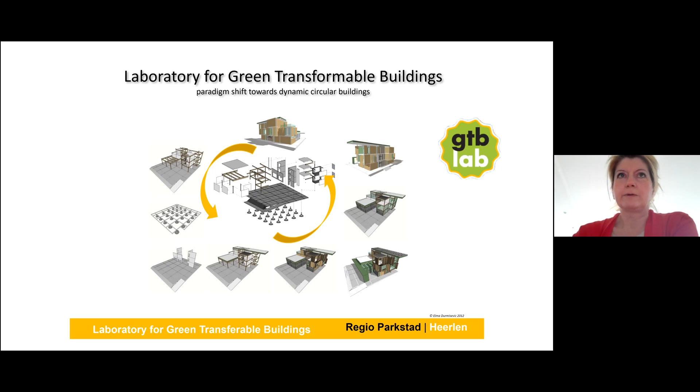So that's the key issue around the development, and all tools and protocols that we are developing in that direction have to do with this great fundamental shift in the way how we see buildings in general. And that brings additional complexity to the system of architecture and construction in general, which deals with integration of functional, technical, and aesthetic systems and subsystems into a final system of building.

And this new approach towards reversible dynamic structure increases also the complexity of the design process and later construction, as the design teams need to deal with dynamics of spaces of buildings. We need to define multiple strategies for use of the building, but also use of systems, components, and materials.

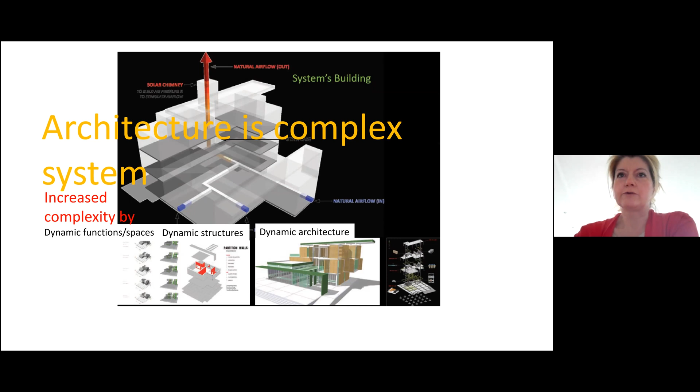And that will bring us also to the discussion about the architecture and dynamics of architecture, and how it will still remain a kind of coherent part of our society, and the part which is providing a cultural continuity for future generations. So that will be kind of an interesting aesthetic discussion that we are coming into.

But going back to the talk of today, the aim of GTB Lab is to demonstrate these reversible building concepts and the impact that such buildings and buildings designed in such a manner will have on new value propositions, and will enable us to design upgradable buildings and built environment in the future.

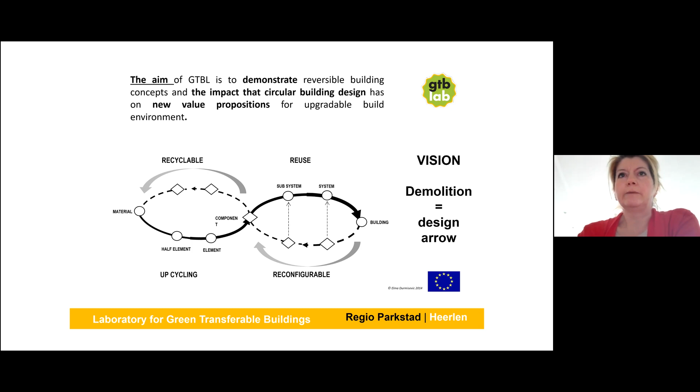And basically, we try to close this loop of material use and the material streams through the built environment, and eliminate waste by design, because everything starts with design.

What we'll try to do with the demonstrators, which will be happening on the site of GTB Lab, is to demonstrate that it is possible to reduce the waste significantly also during construction, but also during transformation of buildings. It's possible to reduce the consumption of raw materials, CO2, and also at the same time increase comfort by integrating natural light, air, and green in the buildings.

So it's a kind of integrated approach to the better life and better quality of buildings in our new world of circularity. We do that by designing and focusing on design for high reuse potential of buildings and their parts, and especially looking into the connections.

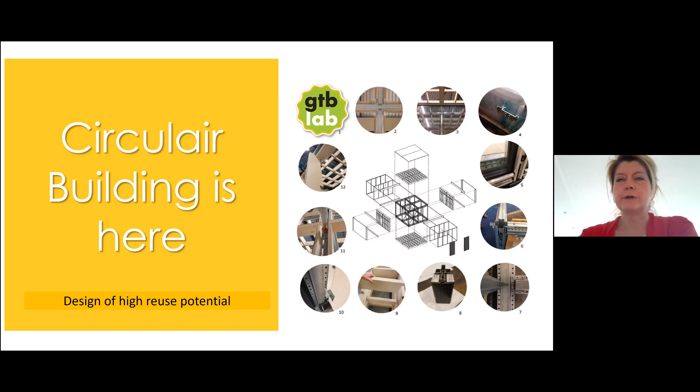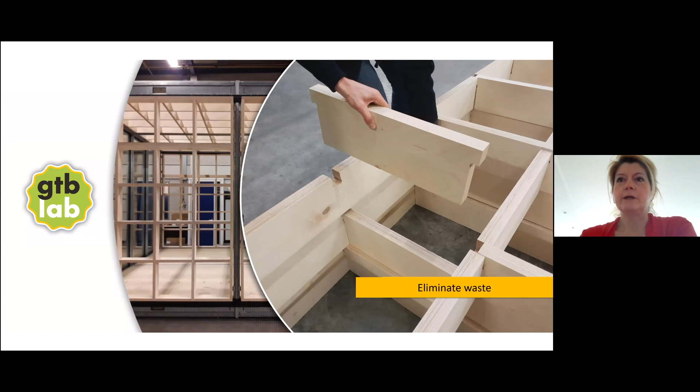One of the important aspects of this new generation of buildings is also looking into exchangeability and design of functionally independent parts of the structure, which can be easily taken out, and checking and analyzing the assembly procedures, which will enable us to design and deconstruct parts with high value recovery in mind. Because everything I've been talking about stands for a new way of perceiving buildings, which I call reversible buildings.

I developed reversible building design protocols during a European project, buildings as material banks, and continue working on this approach further. Basically, reversible buildings stand for buildings which have multiple layers, as you can see here. Buildings have multiple dimensions, and these multiple layers gain multiple future capacities, and therefore future value propositions. That's what we are demonstrating and working on.

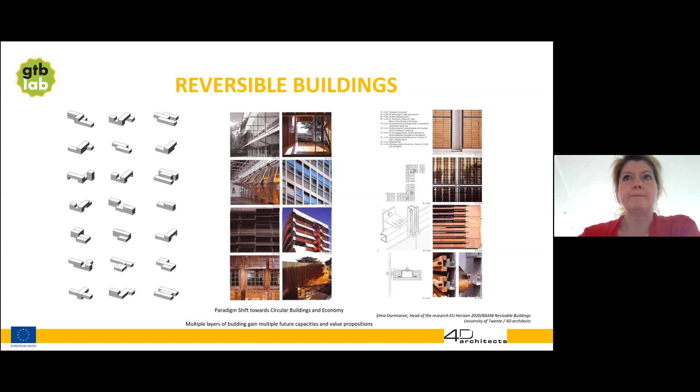That whole development has actually been boosted very much in recent years. I've been working on this for more than 20 years, but I feel and see that these discussions are involved more and more. So there's a kind of awareness of urgency to move swiftly because of the state of the art today.

Environmental issues and degradation of our environmental capital, which we see today—there's something which we have inherited. The life support system that supports various ways of life on the planet is being destroyed by our actions and the way we consume materials. Of course, the built environment has a major impact on this situation. We realize that the way we are consuming materials is creating and leaving behind dead matter, which is not producing oxygen or clean water or whatever, and brings us to a very dangerous situation.

That's the reason why we are talking today about circular economy, and we are trying to figure out ways to move away from this take, make, and waste economy. This involves a lot of discussion on economy too—that's why it's called circular economy, as our whole economy and consumption is built on consumption of resources. And that is exactly the reason where things go wrong: if we want economy to grow, we have to consume more resources.

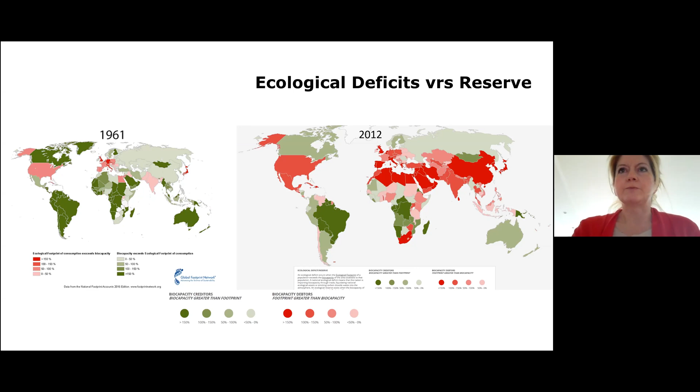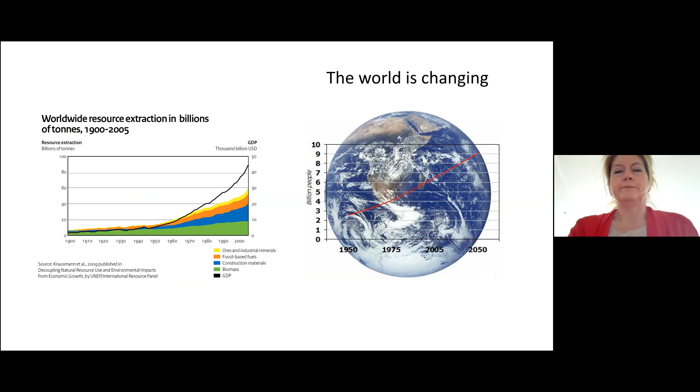Compared to their consumption per year, we see these colors and the planet colors rapidly turning red, meaning that there are more and more countries who consume more resources per year than they have at disposal. So that all brings us to the understanding that this kind of linear consumption of resources, with increase of population, brings us to the point where we will need many more planets in the future in order to sustain life on Earth.

So therefore, the discussion is on the way to change the system, how to redesign the system towards a remake system, where the waste from one industry would be seen as a resource for another one. And when we look into buildings and built environment, that means we should come towards an understanding of our buildings and built environment as a big resource pool and bank of materials for future buildings, and that material streams through built environment need to be organized in that way.

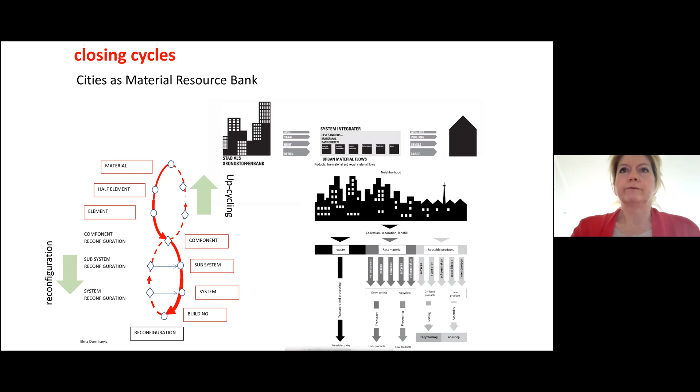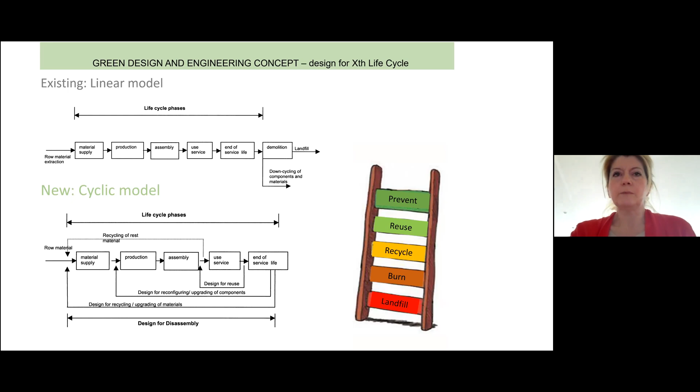So that means we are shifting from a linear use of resources in construction towards closing the cycles, a circular one, where we need to create the smallest circle possible when talking about recovery of materials.

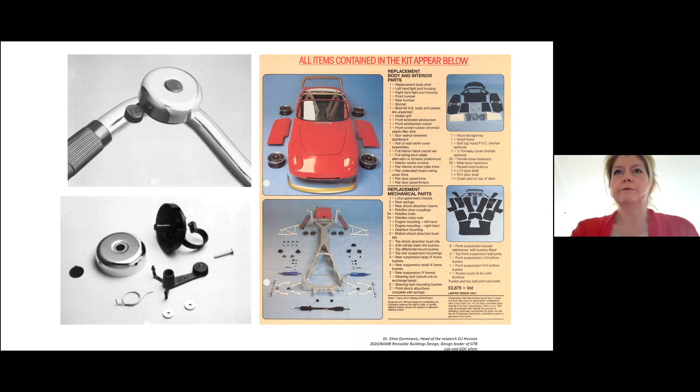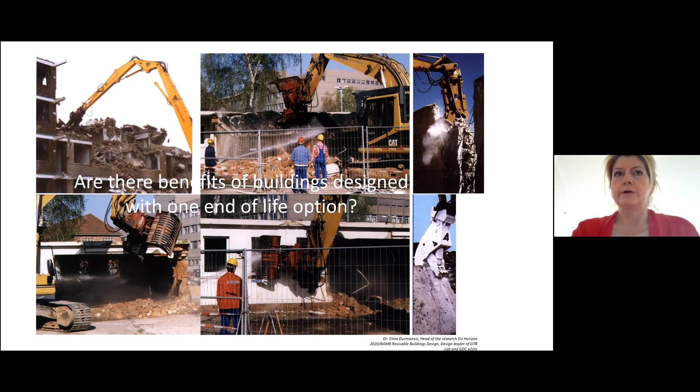In other industries, when we look into other industries, this is a very common approach—it's called design for disassembly. It exists in the car industry for almost 100 years, more than 50 years, and in other product industries as well. But when we look at construction, of course, we know that it's the most conservative industry, and it takes much longer to bring these new approaches into design and then construction.

And the reason for that is, as I said before, because we perceive building as a static structure, and construction is optimized around the reduction of costs and the time of construction. We don't take into account that materials which we bring into buildings have different technical life cycles, but also different functional life cycles.

That's the reason why that's happening. And what we are doing in the GTB Lab is we are trying to reverse these relations with dependencies in building structures, develop a new approach to understanding and designing structures, wherein from this dependent relational diagram, we will move more to more open hierarchies built on two very important indicators.

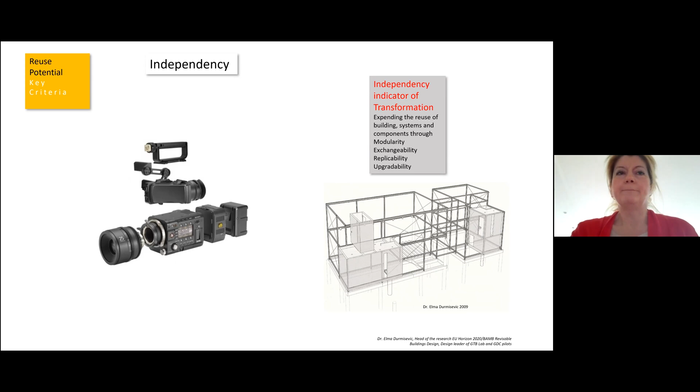Independency is creating buildings with independent, exchangeable modules, like cameras, whose functionality can be adapted by exchanging different functional modules of it. And this exchangeability, by standardizing connections, again, experience of similar solutions can be found in electronics and other industries, which are inspiration to what we are working on.

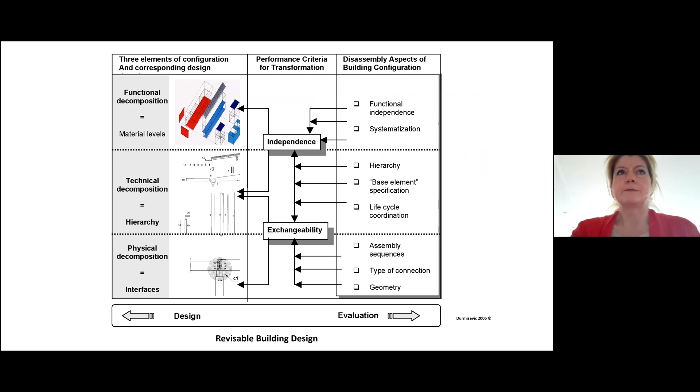Because independency and exchangeability are key for us to work further and identify approaches in design and construction to allow for functional, technical, and physical flexibilities and reversibilities of structures. And that's how reversible building is designed and defined.

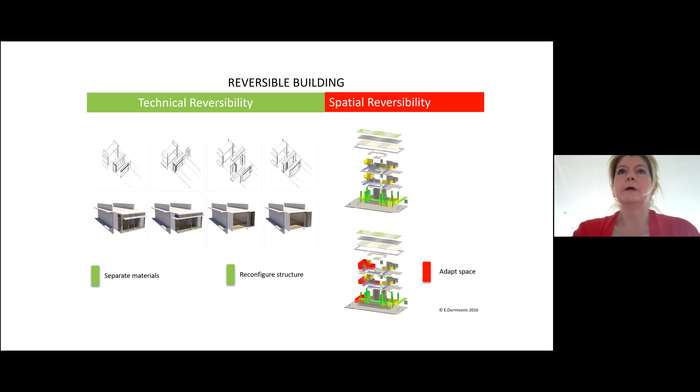This reversible and circular building has at its core two key elements. It has its spatial dimension, and a real circular building should not be demolished at all — it should be upgraded and transformed. And it has a technical reversibility dimension, where parts and systems are recovered and materials separated for other use.

In terms of design, I defined three dimensions of design of reversible buildings: spatial, technical, and material, which are built around the key triangle of reversibility, built on adaptability and reuse, supported by disassembly.

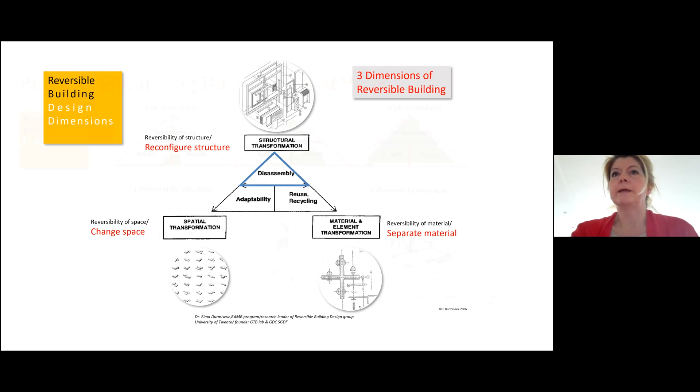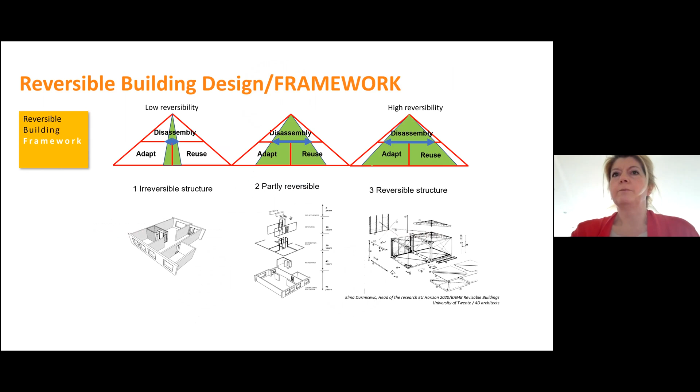So this is a general framework, maybe a very long introduction, but a general framework which helps us understand the performance of buildings with respect to their reversibility and circularity, and helps us cluster all buildings from irreversible to reversible, and develop measurement tools to indicate which parts of the structure of the built environment are reversible, which are not. As you can see here, I will not go further, but that's the framework.

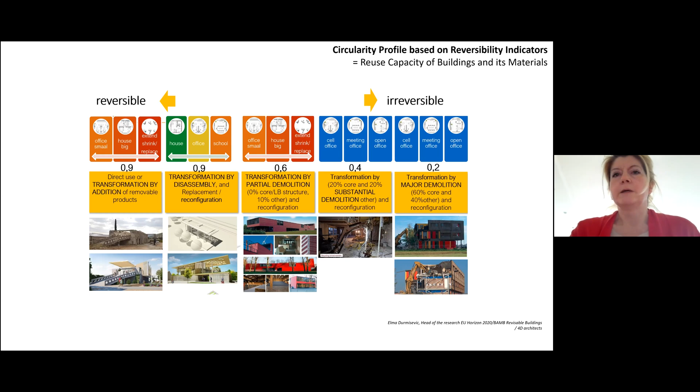On one hand side we built the design protocols, on the other hand side, tools and measurement systems that help us understand the profiles — circularity profiles built on reversibility.

In order to support designers, but also construction industry and everyone interested in improving the built environment towards circular and reversible, I developed a toolkit which has, on one hand side, reversible building design protocols, but it starts also with tools which assess the reversibility, technical reversibility of the building, and how easy it is to take an element out.

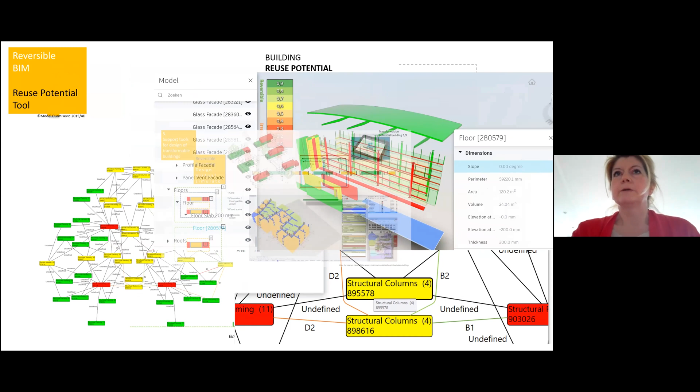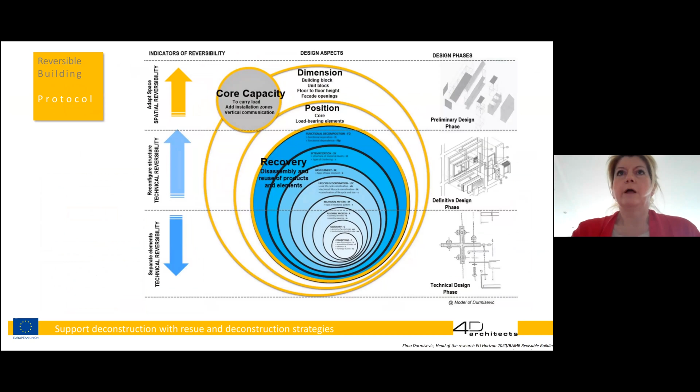It also looks into the spatial dimension of a building, and measures technical capacity to adapt to different functions. And there is a protocol for designers which informs them how to design buildings and products that are reversible, and will help us come to an upgradable built environment of the future.

So this GTB Lab is bringing all this together — on one hand side, development of knowledge, capturing and sharing knowledge, but on the other hand side, also demonstrating and developing physical concepts, building concepts and products, and demonstrating how they look.

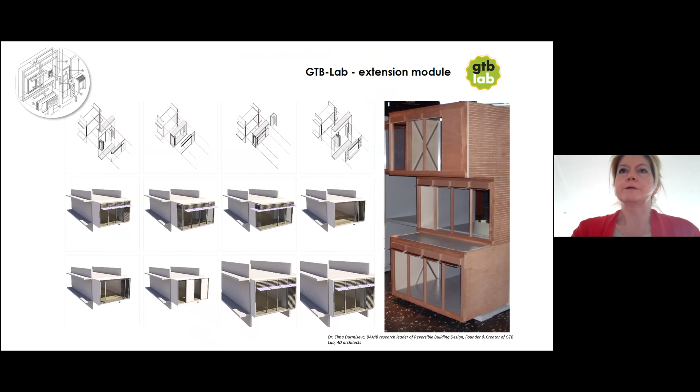Within the lab, we are developing new systems as part of the facade system, for example, but also bathroom systems, as everything in a building needs to be redesigned in the direction of easy recovery and transformation of spaces.

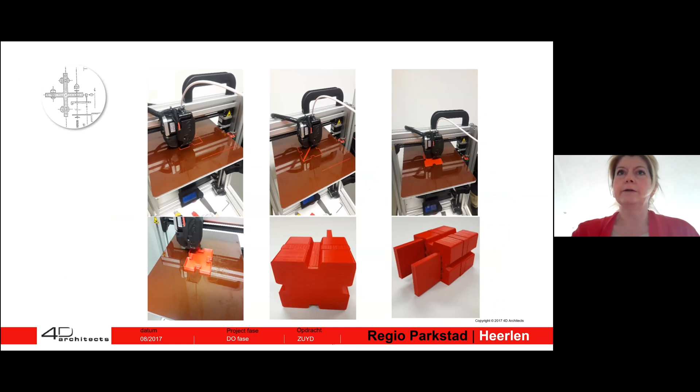But we also develop connections with industry that will enable this reversibility of other parts in a building, prototyping different new products together with industry, demonstrating how they work.

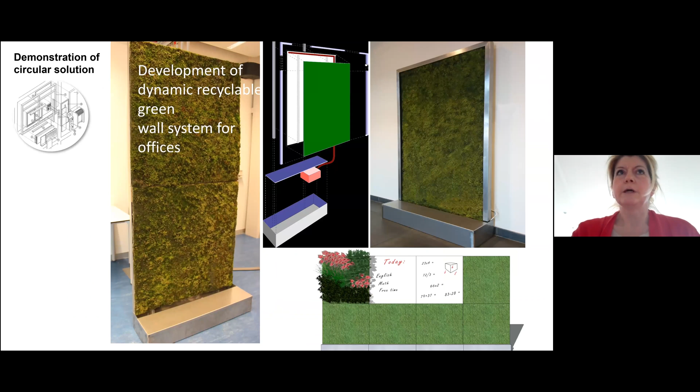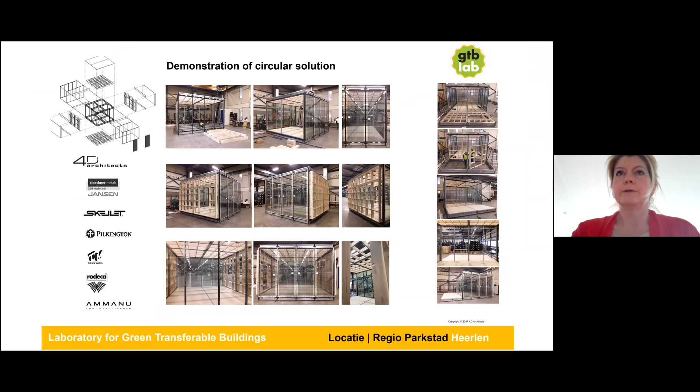We also help initiate new industrial processes in order to help industries start investing in that direction as well, and of course demonstrate — we'll be demonstrating on site with the GTB Lab how this transformation happens without damage to the materials and with high-value reuse of materials themselves.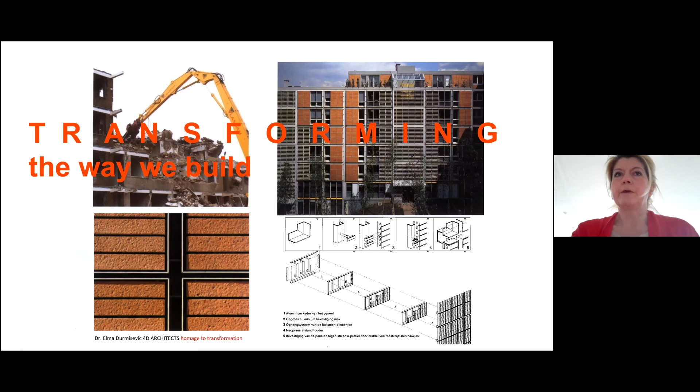So this all brings us to the point that in the future we will need to design and perceive spaces differently, treat and use materials differently, rethink the way we build, how we construct — new concepts of construction methods and so forth — and most importantly, rethink the way we design buildings, as everything starts, as I said, from design.

Much of this I went through very fast, many complex things here, and I'm very aware of that. Much of this you can find, as it has been integrated by the European Commission into the circular economy principles for building design.

So many of the indicators I was talking about have been taken over by the European Commission. There are also some guidelines as a result of the BAMB project. There's also a book we published on 5 pilots where reversible building designs have been tested, and some exploration works with students and so forth.

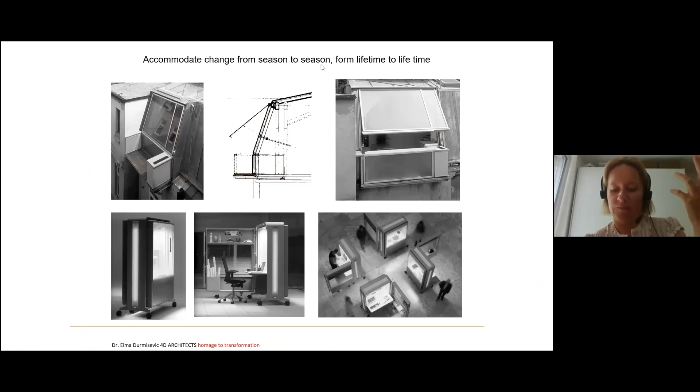Hello. Yes, I can see myself. I hope that you can hear me. Yes. Really enjoyed your presentation. Thank you very much. I was wondering, in terms of the reversibility, some of the pictures that you were showing were looking as if it was focusing on just the structure of the building. But have you also thought about things like the heating and cooling systems? And if so, when you do your once a year reversible or reconfiguration, what happens then? What problems or what solutions have you found in those areas?

Yeah, that's one of the very important parts of the experimentation. So we started construction, as I said, 2 days ago, and this year we are building up the first phase. Most of the parts that we are going to build will be a core of the structure, and in the design of the core we took special attention to the installation surfaces. I had very good advisors here, the top advisors in the Netherlands. We looked into the ways how to build up the concept, where the installation concept will enable us a kind of modular approach to installations as well.

That is one of the things we'll be exercising and actually illustrating, that you can develop integration of installation concepts also in a way that will support transformations of the building without demolition. I'm always telling especially the students of architecture, when I work with them in design studios, we will need very smart designers and architects in the future, because I believe architects will be more involved in design of the invisible cores, which will basically give life to the building in the future. And very often those are really the parts which you don't see at first place, but are very important parts. So that is absolutely a very important part of the exercise.

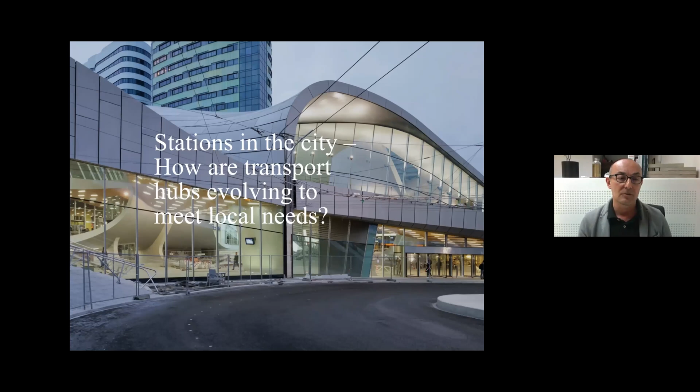So we focus on one material, the facade cladding at the outside, and we follow the whole process from manufacturing stage to operational stage to disassembly stage and the design stage, and we collect all the data into the material passport and connect it to the blockchain.

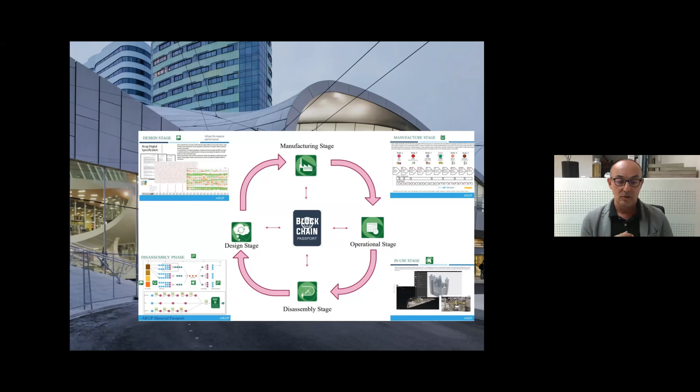So we make an architectural infrastructure to secure the information and to know in case of a disaster. We can provide secure data information so that we can track the process and product to find out if it's due to renovation, maintenance, toxicity of the material, or reusability.

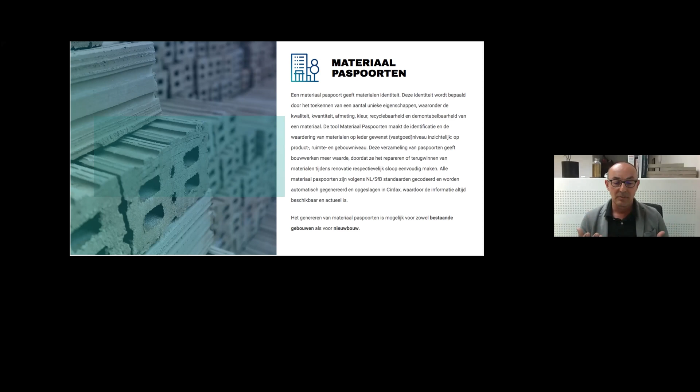Another tool that we designed in Cirdax is the material passport. It gives material identity, and you need that identity determined by assigning a number of unique properties, including the quality of the material, the quantity, the size, the color, the recyclability, and the dismantling of the material.

With a license, you can get into the data system of Cirdax, into the data information platform. And then you have the material passport tool, and it provides insight into the identification and valuation of the materials at any desired level, so a product, a space, and a building level.

The collection of all these passports gives buildings more value because they make it easy to repair and recover materials during renovation or demolition. All material passports have a code according to the NL/SfB standard, and they are automatically generated and stored in Cirdax. So that information is always available and current. The generation of material passports is possible for existing buildings as well as for new constructions.

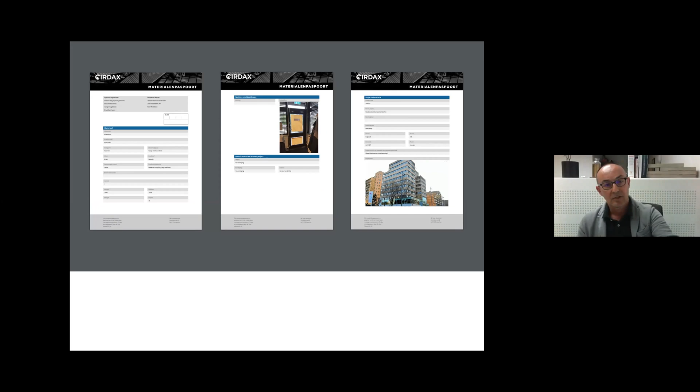What we do now with the Cirdax system is connect the material passport to the blockchain module, and it gives the material identity and property rights. The blockchain does not allow fraud to be done with information. So the material passports are processed in a digital data system further.

So what does that technology give us? To resume, it gives us property rights. The material passports can be connected to the blockchain - it's not necessary, but it can. The passports give the material's identity, and the quality of the material is made transparent. It's safe data. Every material is verifiable. Information is immutable, and new information is added on top of the old information, the ledgers.

Another tool that we designed in the Cirdax system is the CO2 balance.

Well, actually, we believe in a CO2 label for new buildings. It's an extension to the energy label because we think that only the CO2 savings by the energy transformation is not enough. The CO2 reduction achieved by using materials from existing buildings is also necessary.

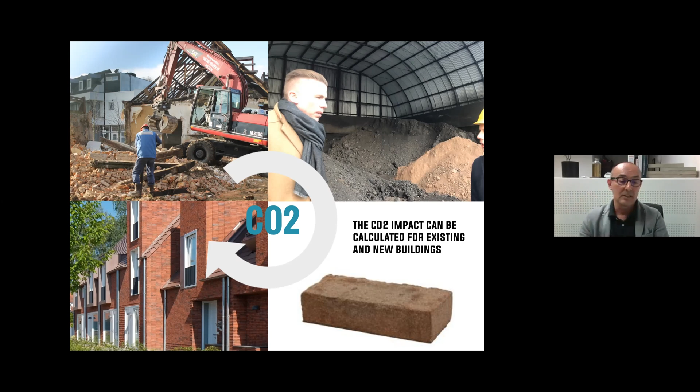As in tons, by linking the balance to the CO2 price. Because we think you have to count the building blocks of your building into the climate impact. And all those calculations ultimately result in CO2 savings, not only per building, but also per region, in the Netherlands, in total Europe, worldwide.

And for me, that's the best way to imply CO2 reduction, based on indicators such as energy, reusability, and material. So the score can be used to upgrade the circular intentions and translate it into finance of the CO2 impact, and gives an indication of the reuse potential in upcoming years to use for exploitation of real estate.

So the higher the CO2 label, the less cost. And that is why I think it's important to introduce a CO2 label for buildings, in addition to the energy label. Even better to connect it, I think, so that all parties have one common carrier to apply the CO2 reduction.

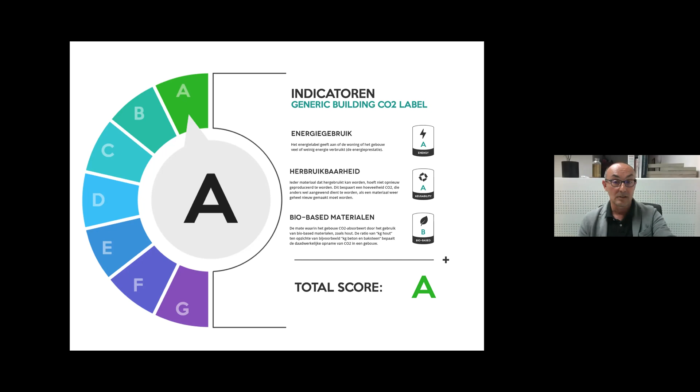Next step is to connect the output of the CO2 balance to the blockchain. So we validate the material now and in the future. So we validate ownership to create economic rights to that material.

All those tools connect the models all together. They are shown and served in a performance dashboard. So it provides a visual presentation of the performance of a project based on circularity, on finance, on CO2 emissions now, and gives us an indication of the reuse potential in the upcoming years.

So these tools make it easy to demonstrate, report, and share results with stakeholders to make better strategic decisions. But if you want to dive into the technical system, feel free to ask for a free demo and watch us on the website.

Just a last recap. For all of this, to use the service to connect the materials on the construction level to the building set level, you need a properly working data system, and that makes the construction circular, because you must have the right information about inventories of the existing materials in the buildings.

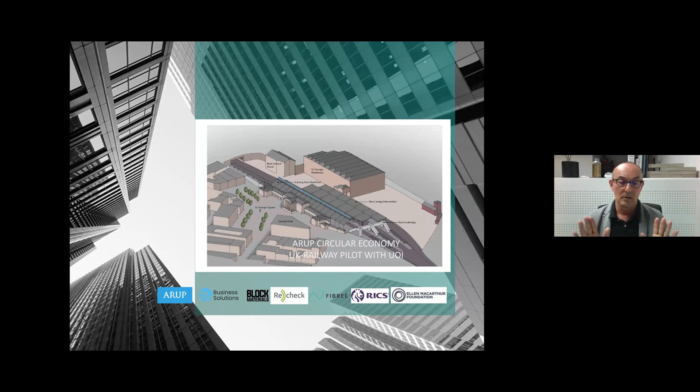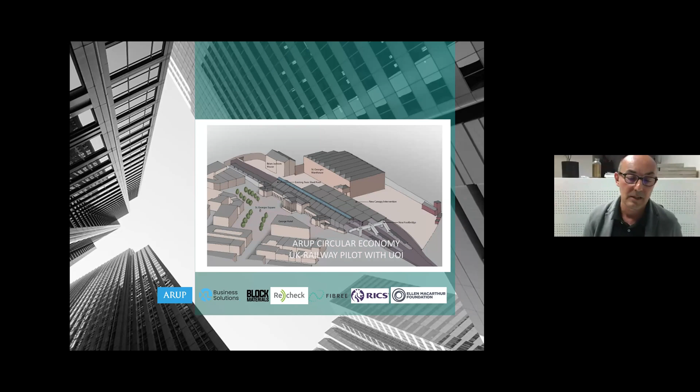Just a recap of what we do: like I said before, we're doing it with Arup. We use the database with a lot of house organizations, governments, etc. But just some projects - this is one, like I told you before, to show you what we can do with the database. So that is the project with Arup.

We are together with Elma. We are in the digital deconstruction project. It's an Interreg project where we combine different kinds of data together to make a new digital tool. We are making at this moment a digital market trading platform. We're doing that with Brightlands and with other partners.

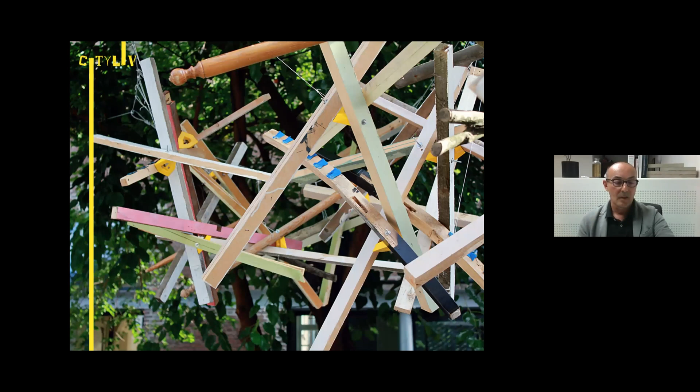I just want to show, because you have a lot of designers in this meeting, but I think it also starts with crazy people, with designers who we challenge to break the boundaries, to experiment to the max.

So just some short pictures of the project City Live, where we challenge designers to experiment - we do it every year - to dare them to break the rules of design, to use reused materials as a source for new materials, and to be an inspiration to restart the process. Because waste, we say, is no way.

So that was my very short - I don't know how short it is. Is it in time? Yes, it is in time for now, my presentation. And thank you for your attention.

And I think maybe you have some questions, or not. Yeah, all right, thank you. Yes, you were perfectly in time.

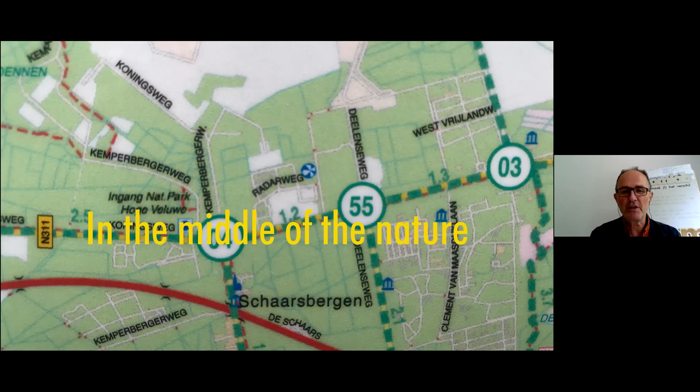We started in this workshop, and it's in the middle of nature, so nature is part of my living, and every day I enjoy it. The value of nature is very noticeable to me.

The focus now is on the 3D pasta printer. I created a paste like mortar, like a concrete mortar, a paste or clay that you can make things with using a 3D pasta printer.

This developed into a really working construction material. We call it a material prototype.

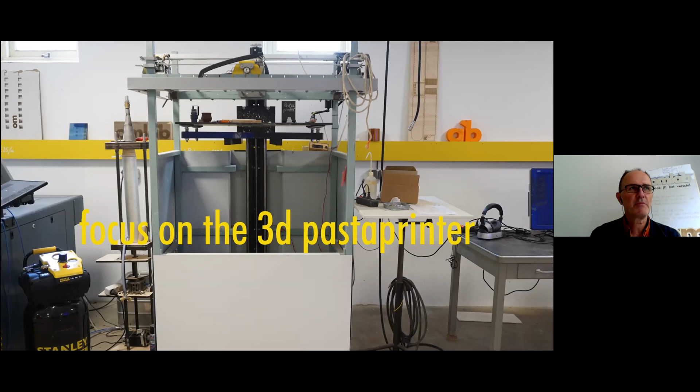We started with clay printing, but clay is a fantastic material. We know it already, we build houses from it, but it's also nice to print with because it's very solid. It's nice working with it.

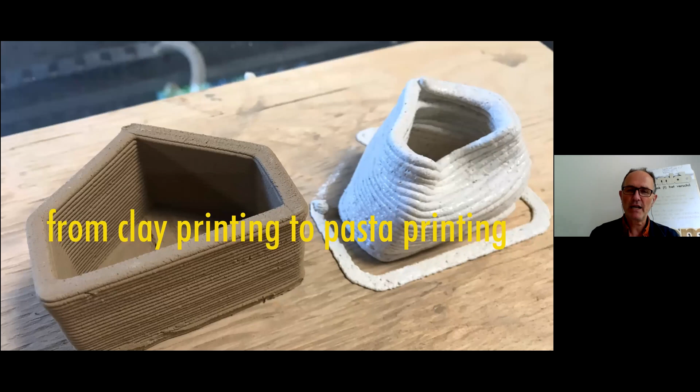But the pasta we made at first didn't give us the opportunity to build strong, solid, high objects. So we developed this with material research, and we tried to combine different materials into something that will be solid while printing. That's the material research we did with students, with my own exercises, and I have a short video that explains it to the public.

I hope the sound works well... I don't think it will show right now. I think you'll have to watch the video later. I can't show it right now, because it opens another screen.

I explained in this video that I try to make something that is possibly a paste that will help replace concrete a little bit. Because even if concrete is replaced by this only a little bit, it's gaining a lot.

The material I make now is made from the chalk from drinking water and hardware. So the chalk you find in your cooking ware, we use to make this paste.

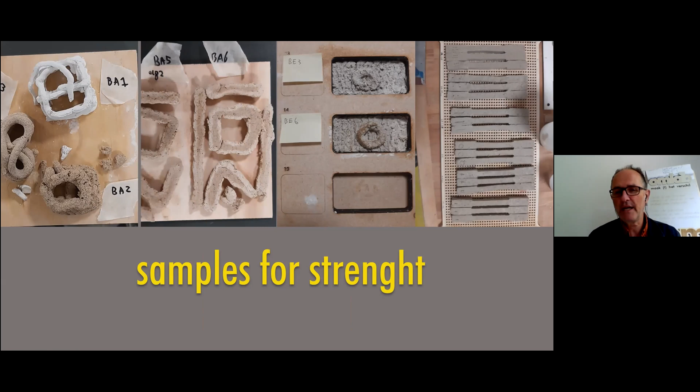We made samples, a lot of samples, including samples to be tested in physical property machines, because we need those numbers to calculate how we can use it in construction.

We also experimented with colors, and the colors we made are now also made from recycled ingredients. The black, especially the brown and the ochre, are made from materials from the drinking water purification process.

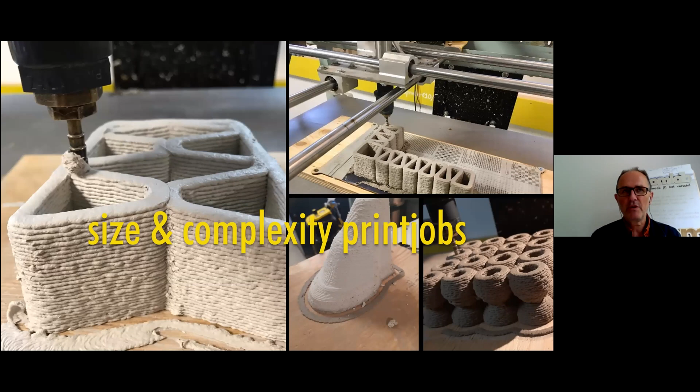The size became more complex, while if you work on the technique with 3D printing, you gain a lot. We need a solution to dry the objects, so we can't use too much material, but we need a lot of air or ventilation to dry the objects.

That's one of the decisions as a designer, as a constructor, to make. Other things are to reduce the use of material, of course.

Complexity also gives you the opportunity to introduce technical details, like how to connect different constructing modules, or how to combine it with electronics or air systems.

So we are working on several of these design questions. Some of them are made more possible in 3D printing by using coding techniques and Grasshopper, a good tool for 3D modeling.

The 3D printing looks a bit like this. The paste is now a lot more stable than in this movie, but it's still moving, so you have to make connections in your parts.

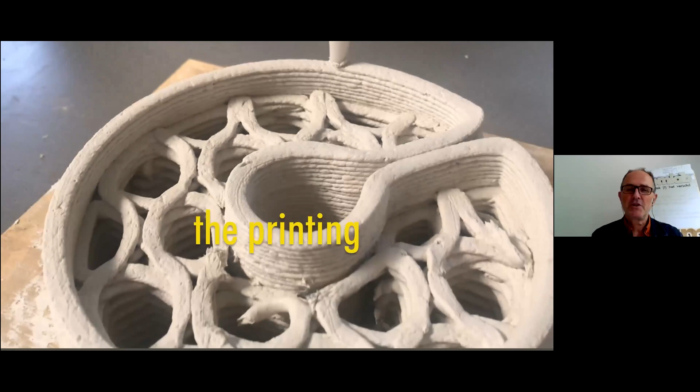The actual project we're working on, the exploded view. The next Dutch Design Week in October this year will show a very big construction, but last year, 1 to 4 models were already displayed.

We work on a project with raw materials suppliers, with professional designers, and together with students from Hogeschool Arnhem Industrial Design and students from Chemical Process Technology in Breda, and this helps us a lot.

The exploded house is very interesting for architects because it displays, in an explosion of a house, all types of materials that are bio-based or from circular sources. This exposition is right now in the Ghent Design Museum and will be displayed in the Fundatie, in Zwolle, in the coming month.

After this, it will travel to the Floriade, where it will be opened, I think, in April next year. So it will be on display a lot more.

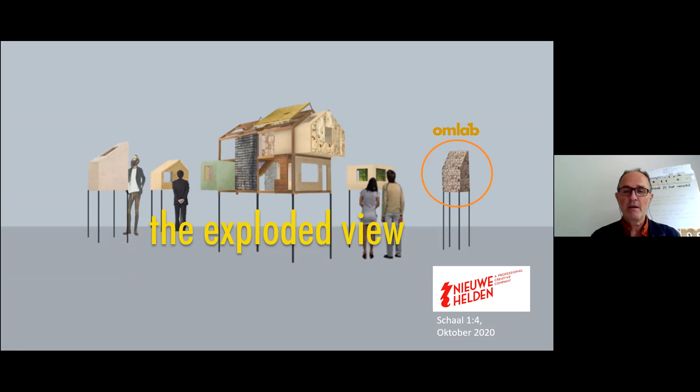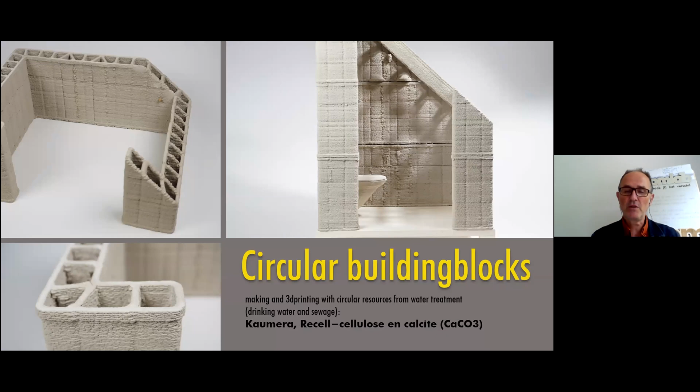It now shows all kinds of materials in the experimental phase, and our toilet room made out of the paste is shown on the right. We're working on this next version. This is the version we showed there. It is a 1 to 4 model, and now we are working on something much bigger.

All the information about this exploded view model is available on the site. It's a very nice, elaborated, and illustrated site, with also a lot of exact and technical information.

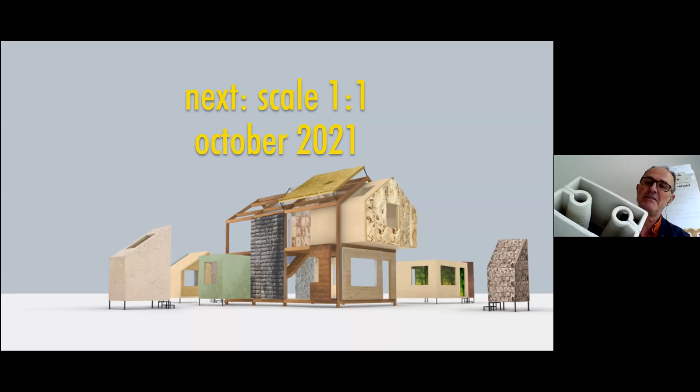The next one is scale 1 to 1. So we will build a toilet room 1 to 1, the wall and everything. I have an example here we're working on right now, so look at the little screen next to it. We're working on a combination of air ventilation and construction, trying to make it even more inspiring.

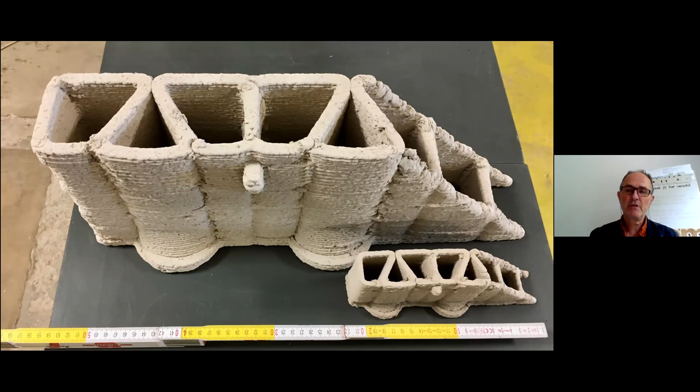These are the samples that are displayed right now in the Discovery Museum. I have one little one here, but the big one is a better example. You can feel it in the Discovery Museum. It really feels a little bit like concrete, and it smells also a little bit. So we have to work on it because it's from sewage material.

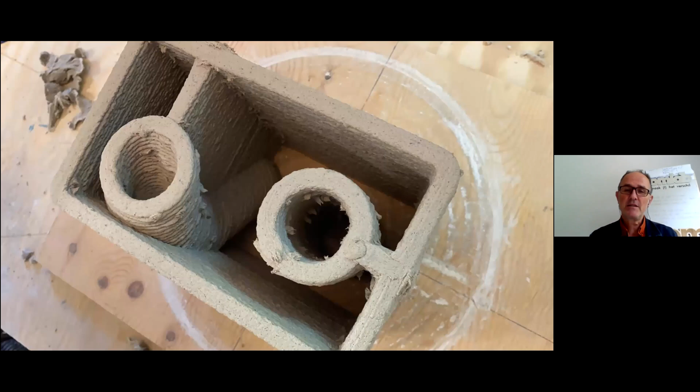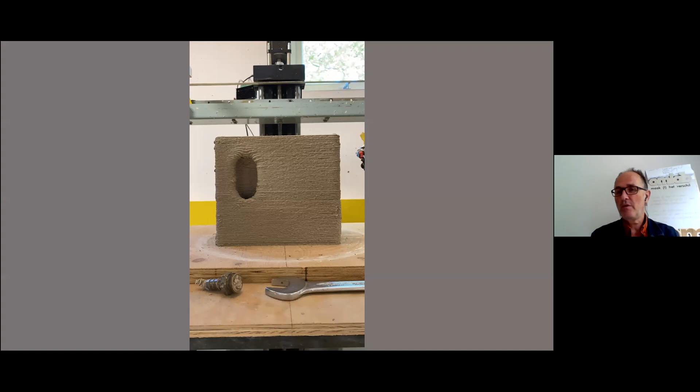We're trying to integrate ventilation channels, combining bigger building blocks than this one into a wall. So you will be seeing it in October.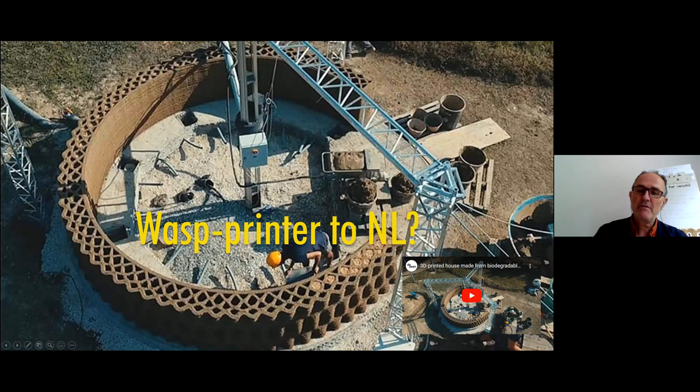I'm inspired by people like the WASP printer designers. The WASP printer is an invention of Italian designers. They made a very nice housing example with nice design of ventilation and construction technique. I can show the movie, I think I have time enough left.

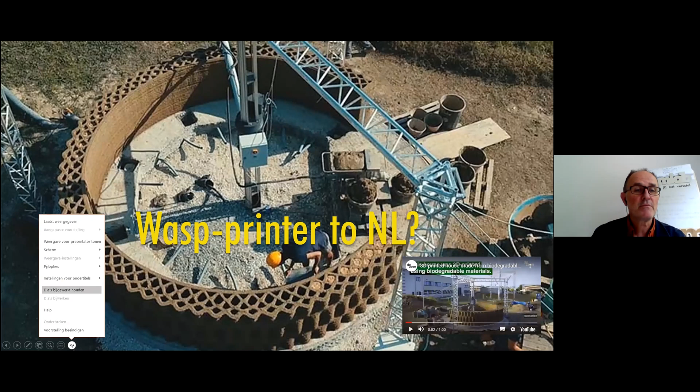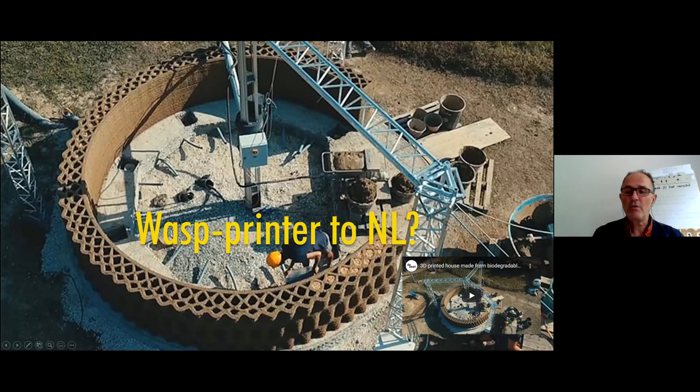Is it, Misha? Yeah, go ahead, I'm not sure if there's sound. Sorry, I'm not sure if there's sound with the video. We don't hear it anymore. Oh okay, there's some issue with my video. Maybe I have to start sound sharing. Is it possible? Yeah, if you stop the sharing and then reshare again, click the button share audio. Okay sure, yes, or we can share the video afterwards if you'd like. Then okay, maybe that's better. That's better, so yeah, we'll share the video in another post.

One of the partners I'm working with now is Brouw. It's nearby Arnhem, and they are really good in 3D printing with a high grade of technology inside it. They can use all the features of 3D printing and work together with intelligent software to make more things possible. Soon I will be doing a pilot with them and hope to share it with you afterwards.

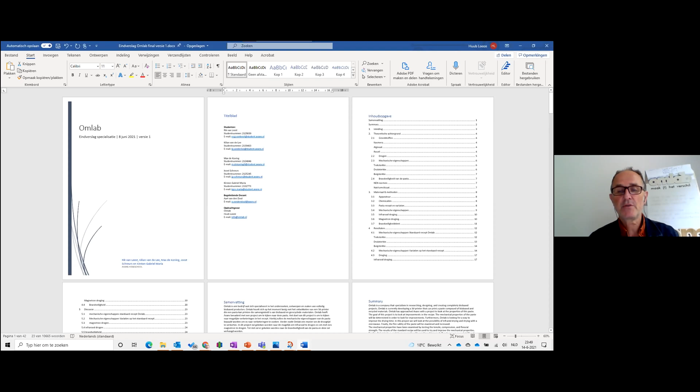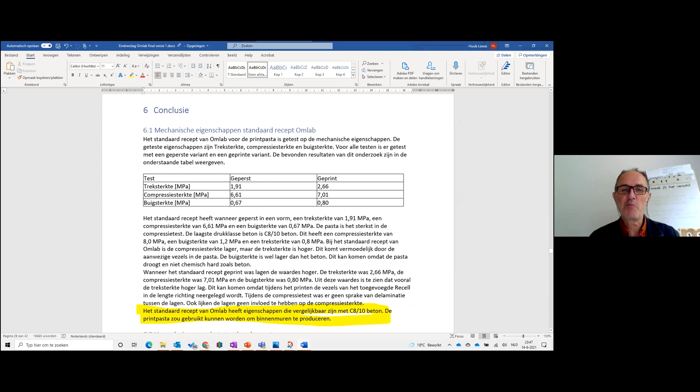The advanced students brought up a nice report and some numbers with physical strength tests, and they assured me that this material I'm working with is comparable to C8 concrete. So there is still more work to do.

Working with raw materials, circular raw materials, is a challenge, and it's also a challenge for the suppliers. One of the suppliers, Agri Minerals, asked us to bring up a project to work with designers and make a proof of concept for how to use this circular raw material. So we started with a few design studios, artistic design studios from Arnhem, and we created some objects.

These are designers, they impact through Wonder, so you will see. They designed an object to help nature, and we call it an oase. This oase will give chalk as a material to regenerate earth that is too sour at the moment, and also give some nutrition to the earth together with seeds.

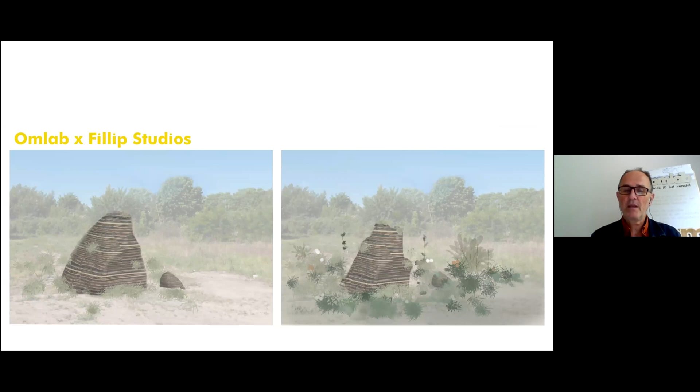This is another part - one of the materials we developed can be regeneratable or very helpful to nature. Now in nature, in the Netherlands, we supply chalk to help the earth grow more normal plants again.

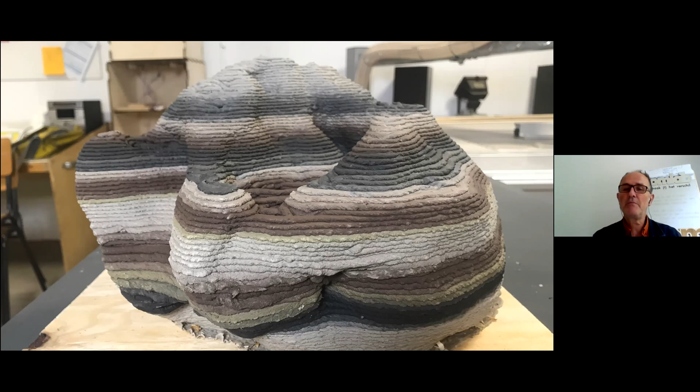This is one of the objects we created, and we will show more at the CODA Museum in Apeldoorn. We wanted to make this really big object in nature, and we dream of making this happen with a 3D printer on rubber tracks, driving it into nature and printing it on site. That will be fantastic if I manage to do this. All the material is available in different regions, so we don't have to transport it a lot.

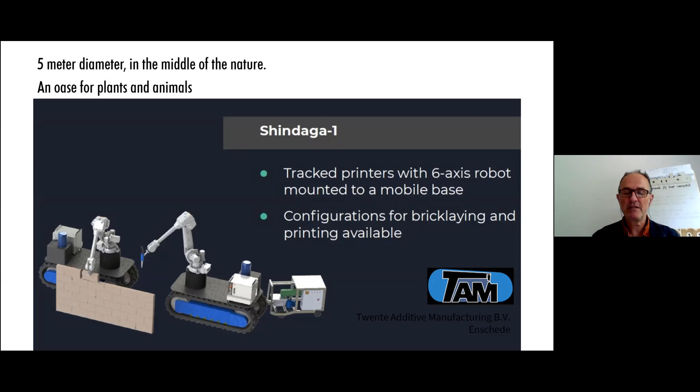So it will be very nice to help nature a bit, in another way of thinking.

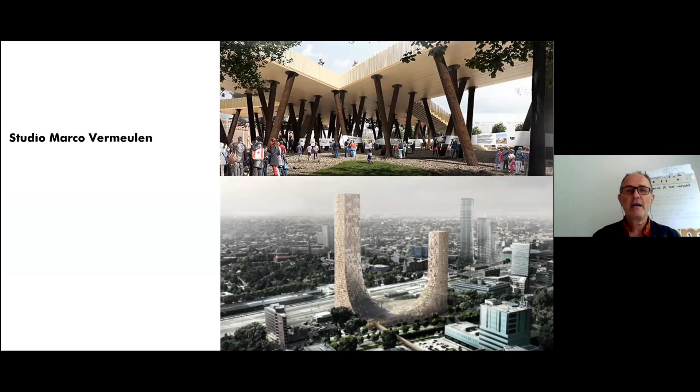The next project we were working on is with a housing corporation. They have a lot of buildings or houses they would like to renew, but the materials that come from it we will use in new objects, probably with 3D printing too, or in combination with our paste. We hope to deliver some nice objects that will inspire new architects, but also entrepreneurs who want to make new buildings, to show that there are other possibilities.

There are some expositions going on right now. The exploration is traveling - one of the building blocks is now in the Discovery Museum. It will be displayed in Nijmegen in Kenniscentrum Circulaire Bouw. As we speak, there's a meeting right now there called Circulaire Oogst, in which they research some buildings with this multiple value creation method, and they're discussing our building block with the mayor of Nijmegen.

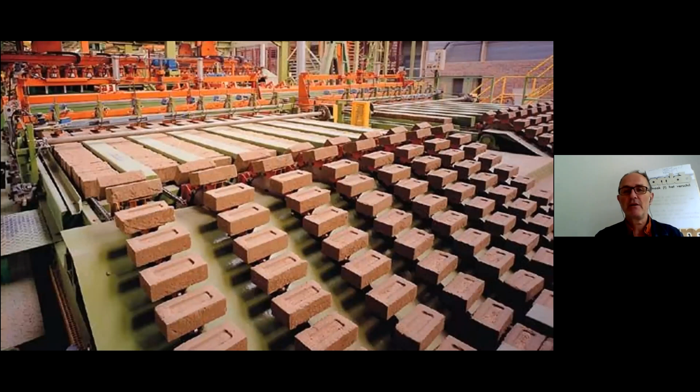We would like to make our material as worthy as clay - think how many houses have been built with clay, with building blocks like clay. So we look at clay building block production to learn from. I call it technomimicry. We like to learn how to make this material conquer a big part of the building materials market. But there's a long way to go, I'm sure.

And maybe some of the parties present in this lecture can help - I don't know, but I'm sorry, I will continue. So, I like to share the things I make with a lot of people, so we can finally achieve more on this earth. There's no second earth, so on this earth, yes. Okay, thank you.